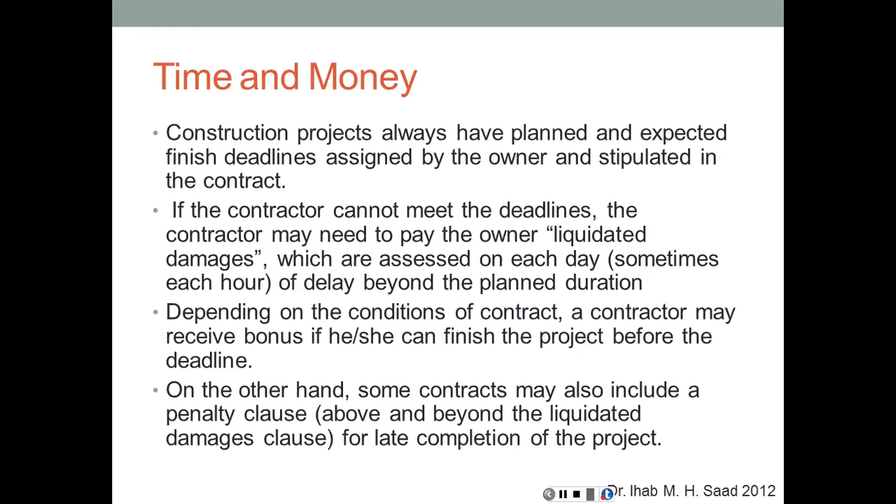So the liquidated damage, as we mentioned, is a stipulation in the contract of a monetary amount that must be paid by the contractor if he or she fails to satisfactorily complete the project by the contract finish date.

We discussed previously the different types of delays, and we mentioned there's an excusable delay where the owner can grant the contractor an extension of time, a compensable delay which is caused by the owner, and in this case the contractor might be receiving some compensation from the owner for any extra losses that the contractor may have incurred, in addition to time extension. There's the non-excusable, non-compensable delay, where the reason for delay is the contractor's fault. And the fourth type, which is the most complex type, is concurrent delays, which is more than one reason occurring at the same time.

So a substantial completion is usually accepted to stop the calculations of liquidated damages. A substantial completion basically is the date by which the owner can practically start making use of the project, and is different from the actual completion date. So the contractual final completion date is different from substantial completion, but usually in most cases liquidated damages would stop if substantial completion has occurred.

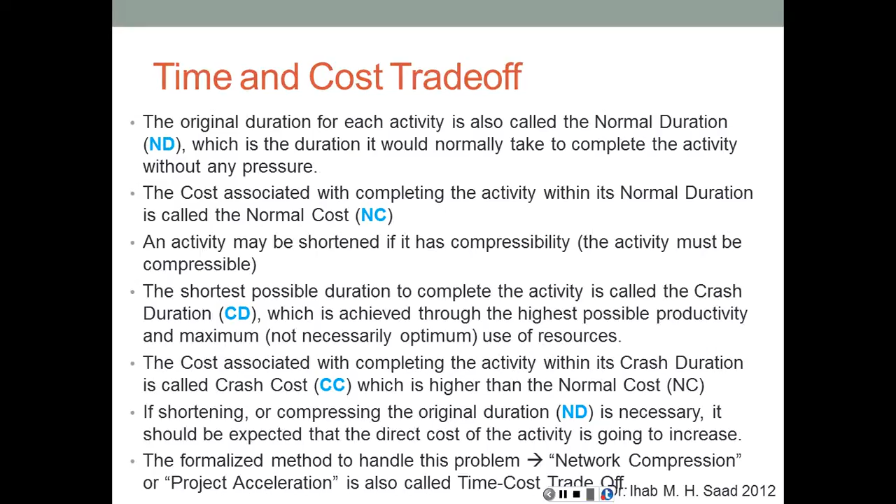So if shortening or compressing the original duration or normal duration is necessary, it should be expected that the direct cost of the activity is going to increase. The formalized method to handle this problem, which is called network compression or project acceleration, is also called the time-cost trade-off or relationship between time and cost.

So the basic objective of network compression is to reduce the estimated project duration by reducing those critical activities in the network, which will result in the lowest added cost to the project. Again, remember, only the critical activities should be considered for compression, because the non-critical activities, until they become critical, have no effect on the total duration of the project.

So one of the assumptions that we're going to make is that the original activity durations represent a method for performing the associated work at a low cost to the contractor. Not necessarily the lowest cost, but a low cost to the contractor. Reduction of an activity's duration will require the expenditure of different or additional resources and will normally result in higher cost. That's the premise that we're going to be working under.

So now we need to learn about different types of costs and different classifications of these costs. Project costs can be classified according to different criteria. One of them is whether they are direct or indirect costs, and this is something that you should have learned in an estimating class, for example, but we're going to talk about it again just to make sure that you do understand this point. The second way of classifying costs is based on their behavior and relationship with time. So according to the first classification, the cost can be either direct or indirect.

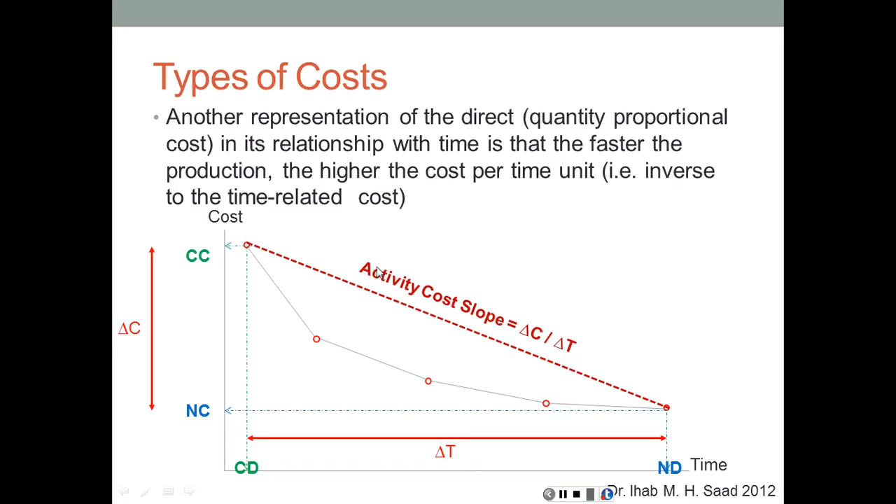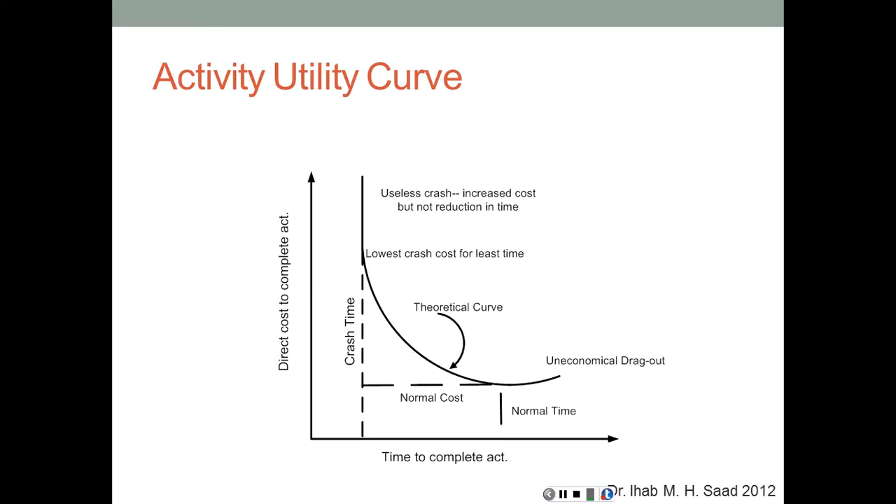So now that we have managed to combine all three different types of costs, time related, once only, and quantity proportional, we converted them into a time cost relationship. Now we can add all of these three costs together to get what's called the activity utility curve, which looks like this. This activity utility curve shows us that at a certain point in time we're going to have the lowest cost. That cost might increase if time exceeds a certain amount, and if we try to shorten the project too much, that cost is going to go much higher as well. We're going to revisit that curve a little bit later again.

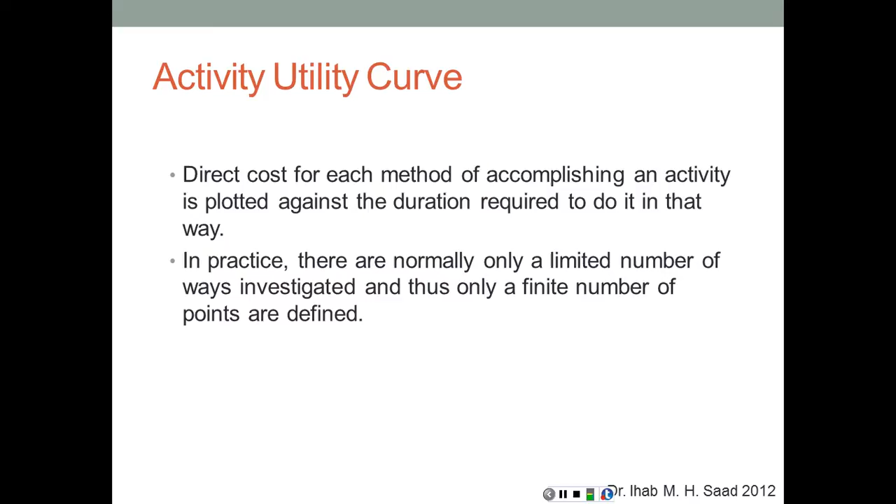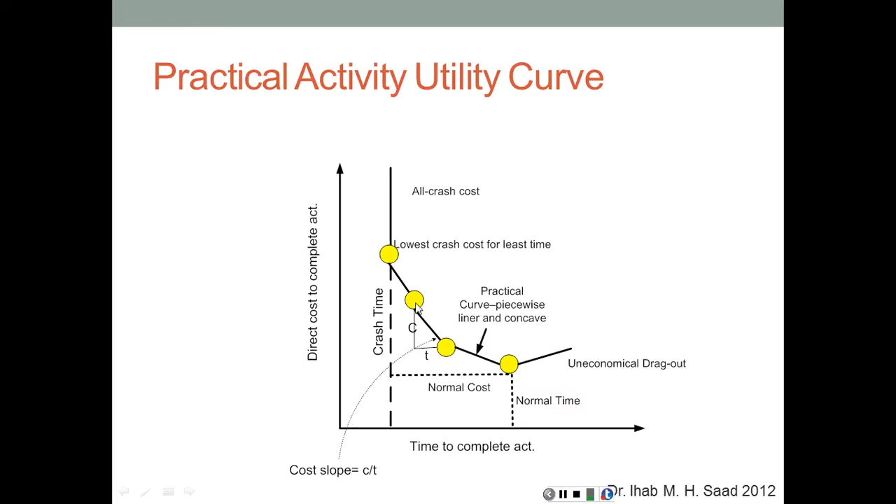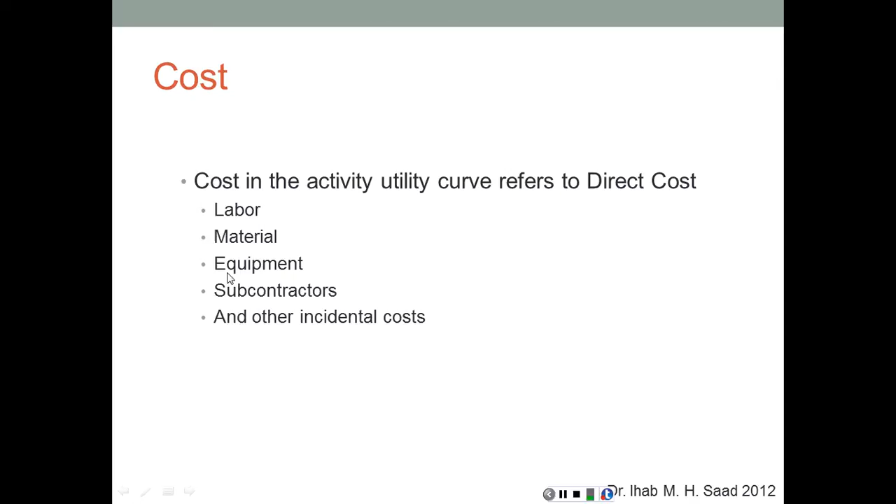So with the activity utility curve, direct cost for each method of accomplishing an activity is plotted against the duration required to do it in that way. In practice, there are normally only a limited number of ways investigated, and thus only a finite number of points are defined. So here it shows the discrete points, point 1, point 2, point 3, point 4, and the cost associated with each one of these. Here's another activity with another example. So cost in the activity utility curve refers to the direct cost only, including labor, material, equipment, subcontractor, and other incidental direct costs.

It can take considerable effort to develop multiple point curves for all activities. Therefore, only important activities may be evaluated, the ones that have a large impact on the cost, and you can reach such activities through what's called the Pareto analysis, which is based on the statistical assumption that 20% of the activities in the project are going to cost 80% of the total cost of the project. There's another discussion where we can find out which activities are these 20% that form the 80% of the cost. It's assumed that an activity's duration can be shortened one day at a time from point to point on this curve. These are the incremental changes. This may not be true, however, but usually does not pose serious problems in the final solution. We can accept this assumption for the time being.

So by compiling the different utility curves for different activities, critical activities primarily, and even non-critical activities at this point, a utility curve can be developed for the whole project. The direct cost curve is developed by starting with the normal project duration and its associated sum of direct activity costs for their normal times, and then we can add the indirect costs, and the total cost is the sum of direct and indirect costs.

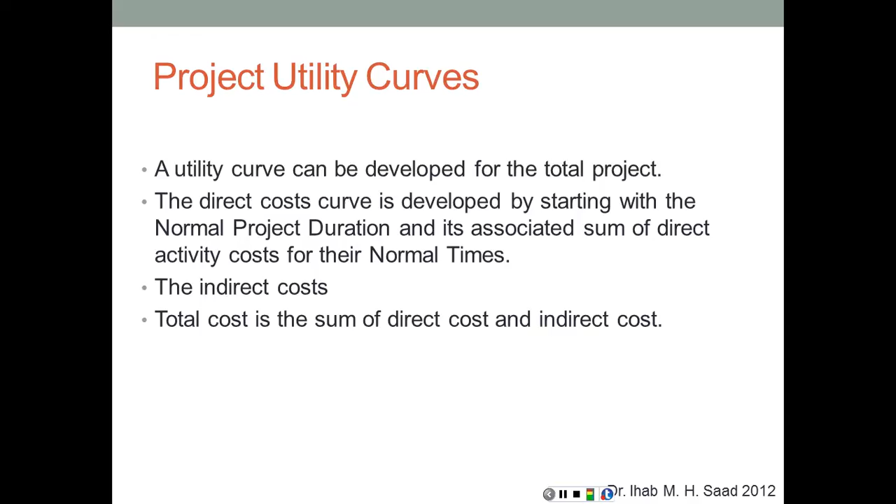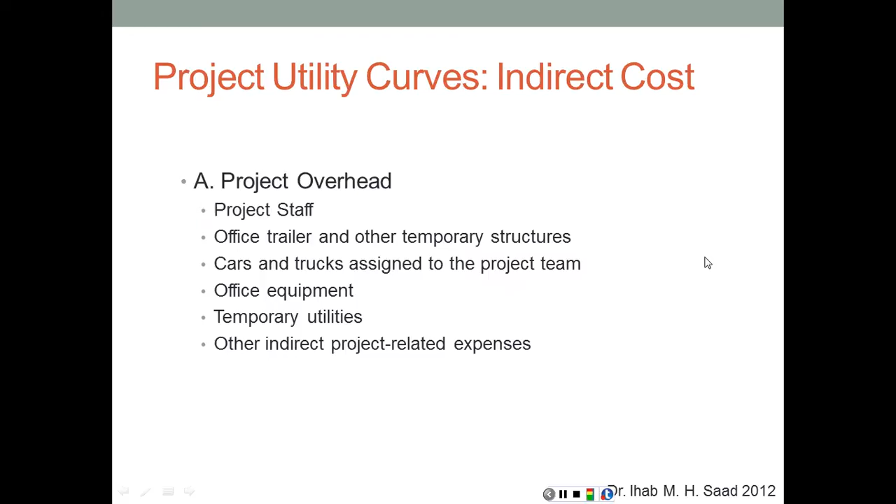The indirect cost is going to include, as we discussed before, the project overhead, including project staff, office trailer, cars and trucks assigned to the project team, office equipment, temporary utilities, and other indirect project-related expenses. And it's also going to include the general overheads, or the head office overheads, rent, lease, etc., main office personnel, main office equipment, services, and other main office expenses, and a contingency fee just for risk management.

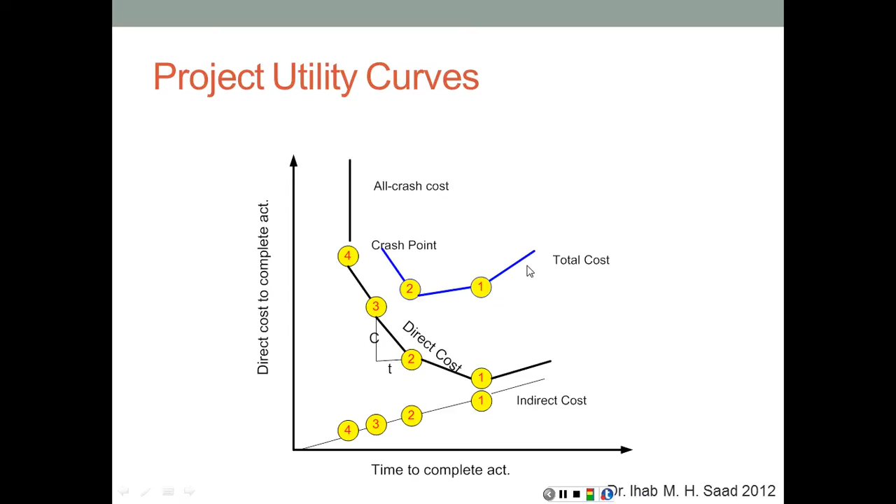So now when we add the indirect cost here, which is usually time related, to the direct cost, we're going to get this curve, which is the total cost. And this is called a catenary curve. Catenary curve, which shows at one extreme it's high, at the other extreme it's also high, and somewhere in between is going to hit its lowest point.

So for example, if we have an earth moving project with a productivity of 160 cubic yards per hour, the total work is 16,000 cubic yards. Equipment operating cost except for operator is $54 an hour. Operator wages and benefits $32 an hour, normal. Overtime wage and benefits $48 an hour, and indirect cost $100 a day. We can now, based on this information, look at different production rates and draw the different discrete points that are going to be connected together to give us that utility curve.

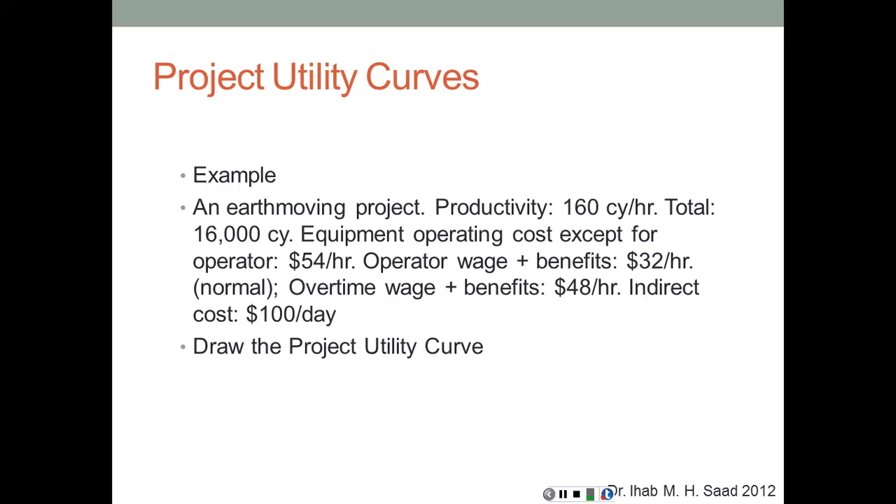So now getting to network compression. How can we apply all of these principles to actually compress a project? Let's start talking about what are the conditions for an activity to be even considered as a candidate for compression. And we're going to find out that we have basically 4 conditions. Remember these conditions, that's extremely important. So the objective is to shorten the total project duration by compressing the duration of activities on the critical path. So first of all, it has to be a critical activity.

So remember the 4 conditions before you start compressing, and for any activity to be considered for compression, it has to be first critical, as compressing a non-critical activity only adds to the project cost without affecting its time or duration. Second is it has to be compressible. Remember when we talked about delta time, which is the difference between the normal duration and the crash duration. What if an activity cannot be compressed, does not have any delta time? In this case, it's called incompressible activity. Therefore, it's going to be excluded from our calculations. So we will focus only on the activities that have a positive delta time, which is a positive difference between the normal duration and the crash duration.

Third, it has to be an effective activity, and this is very interesting. Not every critical compressible activity is going to be effective. Thinking about that, if I have 2 critical activities connected with a start-to-start relationship, if I compress the predecessor, is it going to affect the start of the successor? The answer is no, because you compress from the end of the activity. But since the successor is connected to the start of the predecessor, compressing from the end of the first activity does not achieve any purpose, therefore it would make it ineffective. So, if 2 activities are connected by a start-to-start relationship, the predecessor, or the first one of these 2, is ineffective in compressing the project duration.

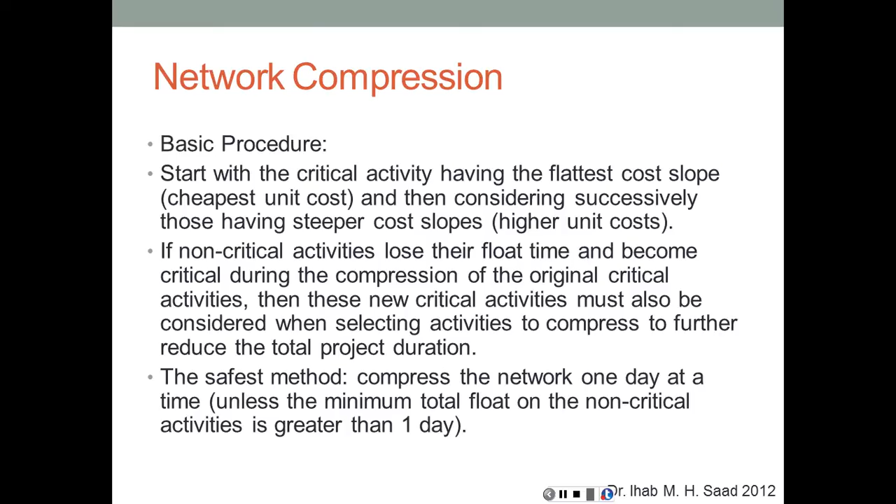At each stage of network compression calculations, follow these steps. First, identify all the activities on the critical path or paths, because we might have more than one critical path. Delete from consideration those with zero potential for compression. So if it has delta T equals 0, that would make it incompressible, therefore it cannot be compressed. Number 3, among the critical activities, exclude the non-effective ones, as we have discussed, predecessors in start to start and successors in finish to finish.

And number 4, select the activity or group of activities, if parallel paths exist, with the lowest combined cost slope, cheapest to compress. And finally, with each cycle of compression, watch for the creation of a new critical path, therefore compress by 1 day at a time, except if the total float for non-critical activities is greater than 1.

At each stage of network compression calculations, follow these steps. Compress the activity, update the network time calculations and the corresponding project direct cost. Repeat steps 1 through 7 until further reduction in the total project duration is no longer possible, we have exhausted all the compressibility in the critical activities, or until the desired project duration is reached. If I want only to compress the project by a certain number of days, I don't need to keep going beyond that, or until the cost of compression is no longer economically feasible or meaningful.